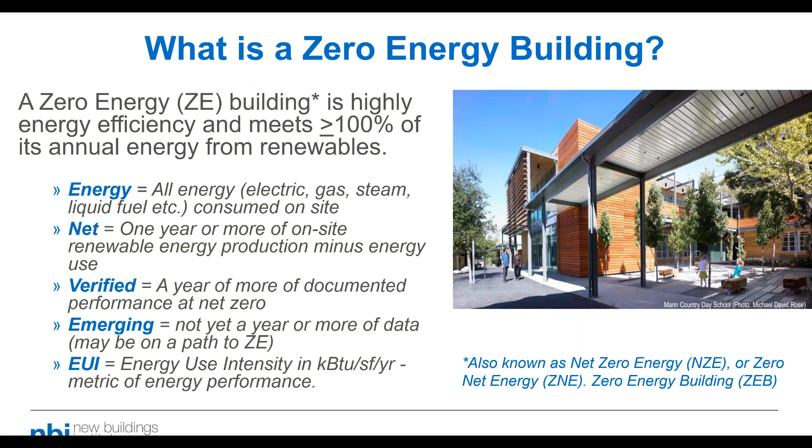And let's get into the fun, interesting parts of naming names. What's really fantastic about NBI's work and our story collecting about what's going on in net zero buildings, zero net energy buildings, is that we name names. No other database is as large as NBI's that collects the exact building, the characteristics in terms of square footage, the owner information, and then the data regarding its energy use.

So then this can serve for you and others and policymakers as well to show where are the buildings, who's building them, what like buildings. If you're a design team member, you want to say, where can I find somebody who's done a retail building? You can find it in this list that I'm going to share the big picture results from.

The first part that comes to mind when we talk about what's going on with zero net energy buildings, we talk about looking at the trends over time. So on the left part of the screen, you see the time since NBI has been collecting this data. We began in 2012 with our first study, and I could name about 60 buildings. And today we have actually 500 or more. We have 482 documented in the report you can get online, and you can see that 67 of those are verified and 415 of those are emerging.

But in the graph on the right, you see it by completion year, a little different than when we found them to put them on our list, which is the graph on the left. You see the trends of when buildings were being built, and you see a very steep curve in the last 5 years of attention to zero net energy and the growth in zero energy buildings in terms of completion.

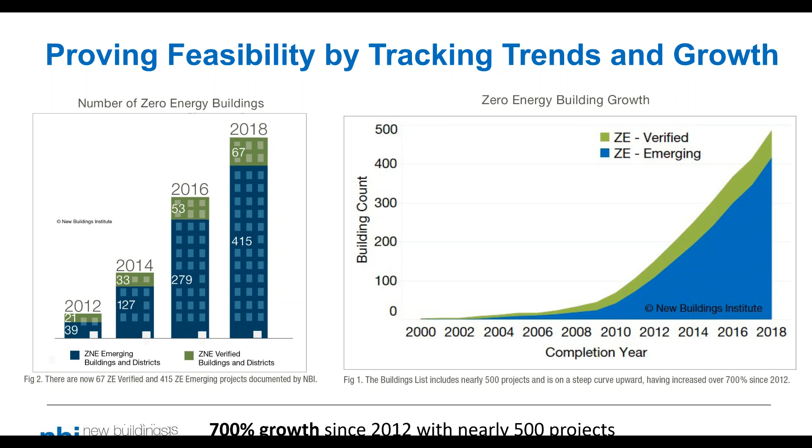Then another trend that also parallels more market trends is that on the left, the older buildings, the buildings that have been around 10 years or so, where we've gotten verified data, were mostly public buildings and mostly smaller size buildings of 25,000 square feet and less. Now we have a large percent, 40% of all of our buildings and 88% of the total square feet, over here on the right-hand side of the graph in buildings that are 50,000 square feet or larger. So that shows a trend that's picking up more market-sized buildings.

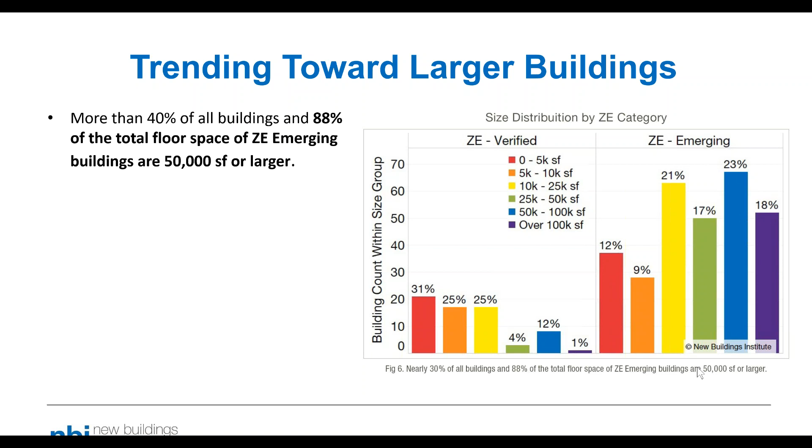And we're also having a fantastic trend with many of you on the phone being practitioners that are moving these buildings forward, designing them, advocating for them with your clients. And we have 70 mechanical firms on the list and 101 architect firms. So growing the tribe of buildings and practitioners that design those buildings is an important part of changing the market.

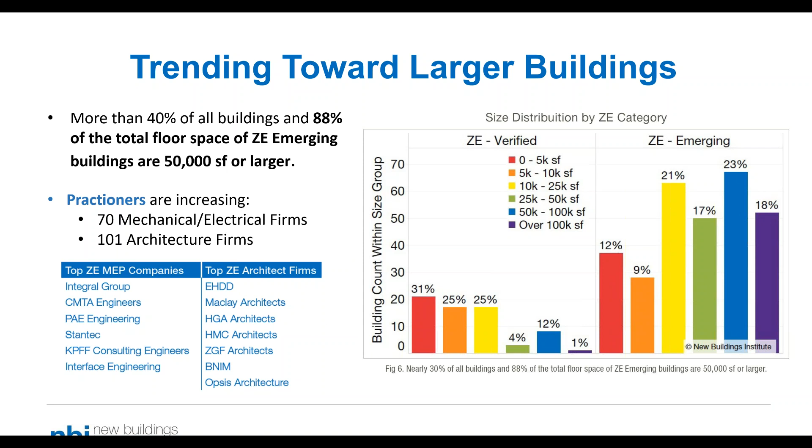Now about building types. As I said, it used to be primarily public buildings, and you saw some trends towards larger buildings, but schools is still the #1 building type. And my colleague here, Reilly Loveland, who's going to speak at the end of today, she's been diving deep into the schools marketplace. So while schools represent 37% of our zero energy buildings, and you can see the breakdown below where K through 12 schools are 50% of those, we're having great growth in diversity of building type, with a

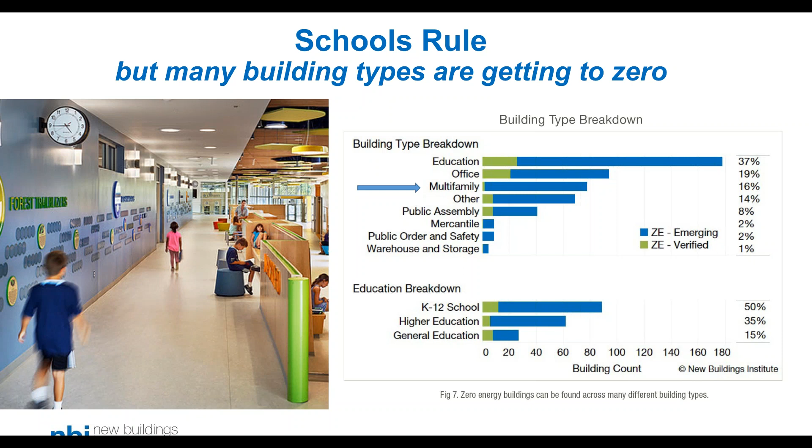high increase in multifamily, commercial type if there's 4 or more stories connected in multifamily. It becomes part of the commercial sector. And I'm showing just the top types of buildings, but we have over 15 building types that have reached zero energy performance or are emerging. And as I said, with the larger buildings coming in, we're seeing more private sector growth.

And this is one of my favorite stories about ZE and one of the most compelling, I think, market transformational statements. Although zero energy buildings are still a tiny part of the market and we've got to make it transcendent to be across the entire marketplace, the fact that we have over here in this left section, 26% of the 500 buildings are for-profit private, and this 46% here are all private sector. That's a fairly flipped image from 10 or 15 years ago, where the early emerging buildings were universities and nonprofits.

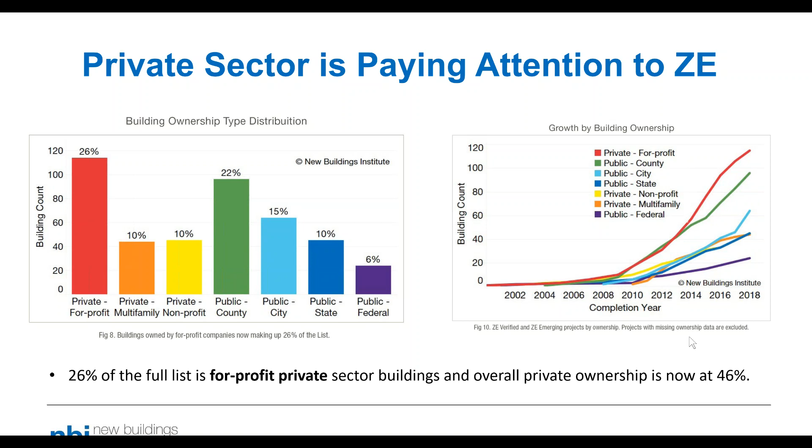And on the right, you see also this steeper curve in the red. That's for-profit buildings starting to take the lead in terms of new buildings that are getting started. So I love that the private sector is paying attention, and we're going to continue to try and get that attention and advance those buildings.

So what about performance? How low can we go? In zero energy, the lowest number wins, because you want to get your energy use down low so that you can then replace that amount of annual energy use with your renewables on site. So zero energy verified buildings have a median EUI, as I mentioned earlier, energy use intensity in kBTUs per square foot, of just 18. And compared to the average office in America, that is quite a reduction, about 60% less energy here.

And often people say, well, those are a lot of older buildings in that data set. But if you look at one of the most advanced codes in the country, Title 24 in California, it's still 46, almost half the energy use of a brand new best code building. So when we say that codes are advancing and there's not much margin left, these owners, these designers, these buildings are demonstrating the margin still exists at almost 50% savings potential over code.

And the same is true for emerging. Emerging are, some are measured performance and some are design targets, but they are also targeting and resulting in energy use in the gray band that is 50 to 70% less than standard practice.

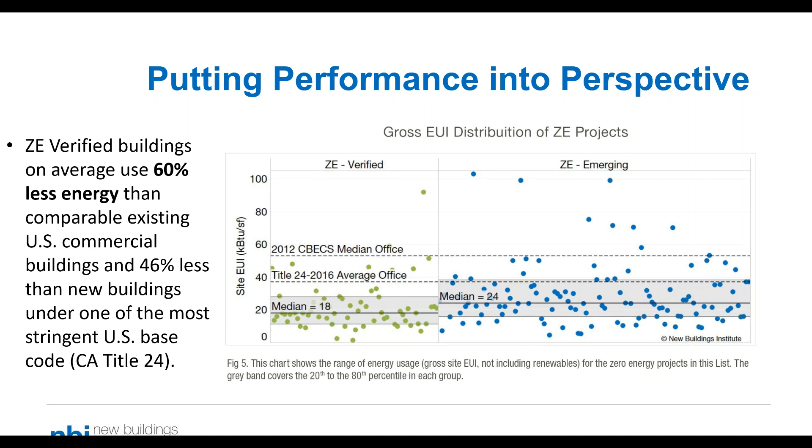So in the closing of this section, I want to mention a couple new collaborations NBI has, especially regarding collecting data and registering projects as zero energy. We're partnering with the International Living Future Institute, and we're going to have a collaborative certification program and a joint portal here on the left. We'll be bringing that out into the market in a few months, later this spring, we hope.

And on the right side of your screen, we're talking to RESNET, and we've formed a collaboration to work with the Residential Energy Services Network. They've done over 2 million homes in terms of a HERS rated system for energy efficiency. And we're going to work with them to move that into the database for zero energy documentation of the residential sector as well.

So your role in getting to zero is to both improve your skills, your knowledge by attending things like this, but also we have a new resource hub, and you can see on the left a whole lot of things that are there available to you. You definitely should be on the action bulletin. It comes out quarterly, tells you everything that's going on in this field that we can gather and put into a short bulletin for your attention.

A number of case studies, a number of resources, and still, when you're looking at data like this, if you know of a building that's even in the planning stage, in the design stage, under construction that might not be on our list, please register it. Share your story and get your building on there.

We'll be having our every other year Getting to Zero National Forum in April in Pittsburgh, and would love you to join us. Fantastic dynamic event, very design team focused, have the energy managers from efficiency programs, government policies, probably the most diverse range of attendees, and really focused in on moving buildings to zero and beyond buildings at the community level, at the policy level, beyond the building into the grid aspects. There's tracks on a lot of different topics you can find on the website.

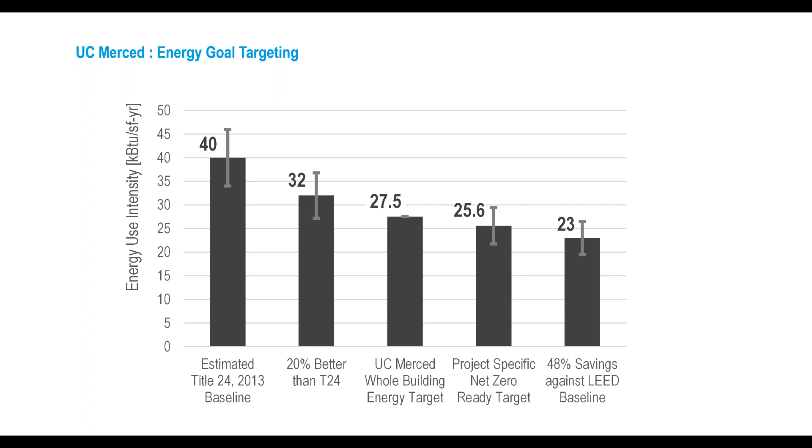So to get the energy use down, the first thing we did was focus on the envelope of the building, and thinking about the kind of heat you've got in this climate. And what you're looking at here is what our daylight modeling and simulation team did: they looked at annual radiation on the 2 worst facades of the building, the south on the right and the west on the left. This building sits on a block in Merced where essentially it takes up the entire block. So we didn't have a whole lot of options in terms of the shape of the building. So we have this big, long, south facade, big west facade. And so go to the next slide.

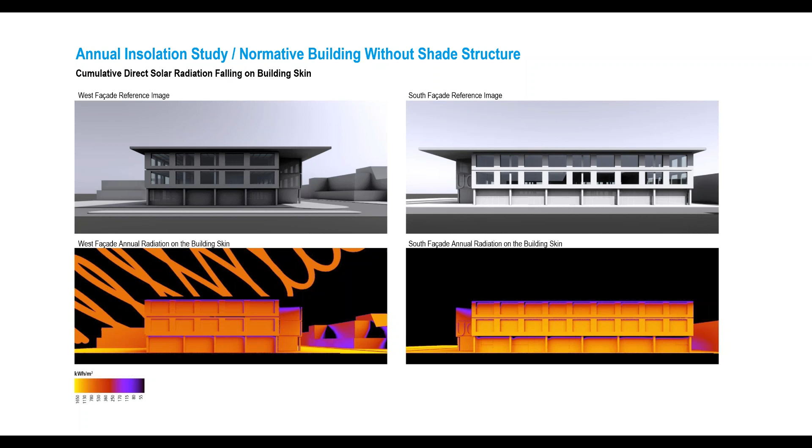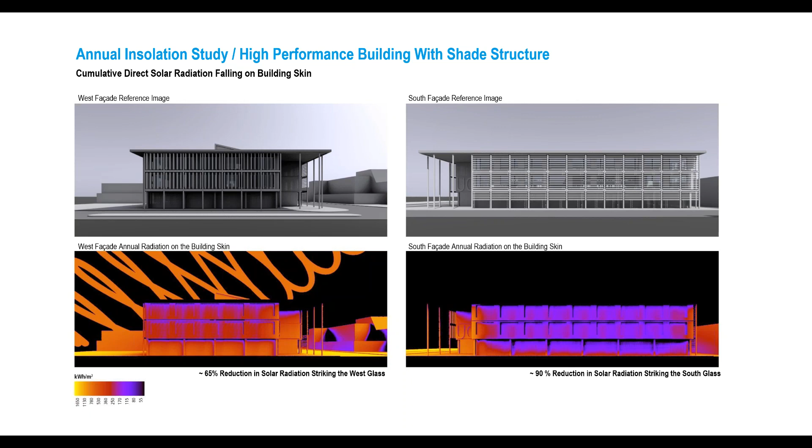And one of our strategies was to use an external shading structure to control the sun on those facades and reduce our cooling loads for the project, and in turn reduce energy use associated with cooling for the project. And so this kind of a shading device on the west and south sides did a great job of reducing that annual solar radiation on the skin of the building. But this project was a firm fixed price project that had a budget that we had to meet. And so these kind of shading structures can be expensive. Go to the next slide. And I'll explain how we paid for those structures in a moment.

The second thing we did with the skin of the building, with the envelope of the building, is we put a clerestory on the roof. You can see this is a big clean roof set up for PV. There's no mechanical equipment up there. All mechanical equipment is in the building or adjacent to the building on grade. So we got a nice clean roof for PV, so we can maximize the PV use.

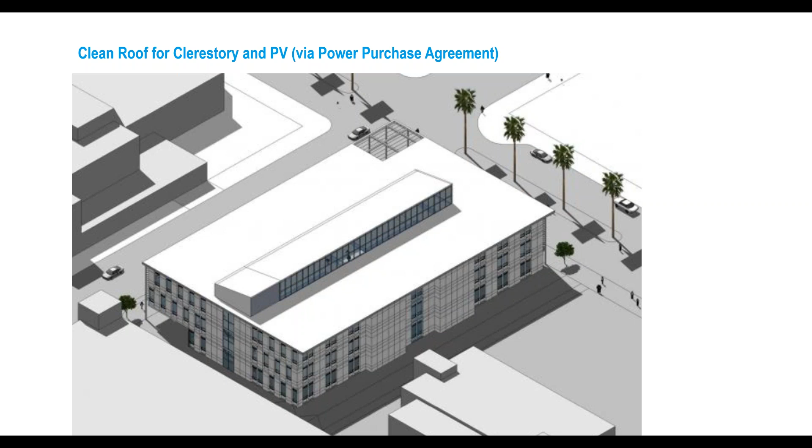And then we popped a clerestory up in there to bring light down into the building, into the center of the building, so that we could have the lights off, obviously, in the building as much as possible to save energy, and also to just enhance the quality of the environment in the building by bringing more controlled daylight into the building. Go to the next slide.

This was another daylighting analysis that will show you the difference between what it's like for a building without the shade structure and no light well in the center. And you can see how kind of bright it is out by the glass and dark it is in the middle. Go to the next slide.

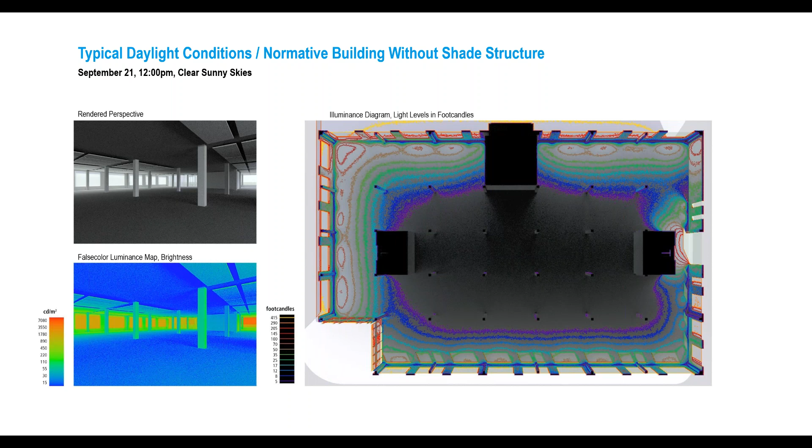Keep your eye up to the upper left here, and you'll see the difference in the quality of the environment when you can bring that controlled light in, and controlling the light on the facade. So this is sort of neutralizing the solar heat gain at the facade, but especially on the south side, that shading device actually bounces soft light into the space, bringing it in from the middle of the building, and able to turn the lights off many more hours of the year. And you have a better quality space as well. So go to the next slide.

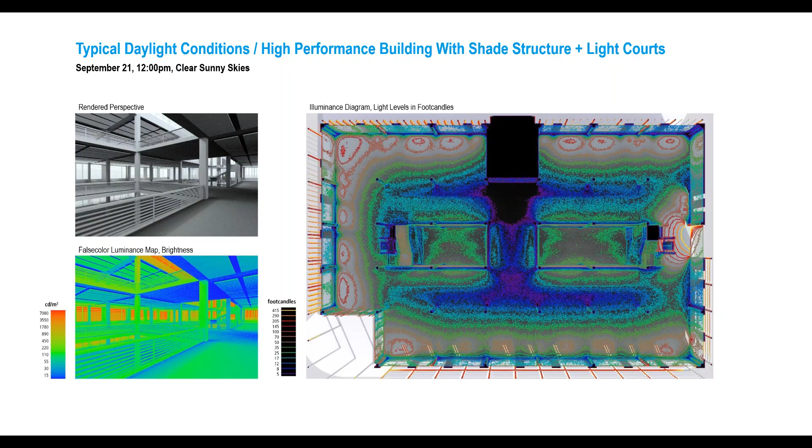Now let's talk about the energy and the dollars and cents of this. So we hit our target. We looked at a conventional HVAC system, which you can see as the second from the left graph, which was our baseline to compare against. It wasn't meeting the 27.5 target that we had to hit. Even with the shading device, we couldn't hit that target. Same with a fan coil system.

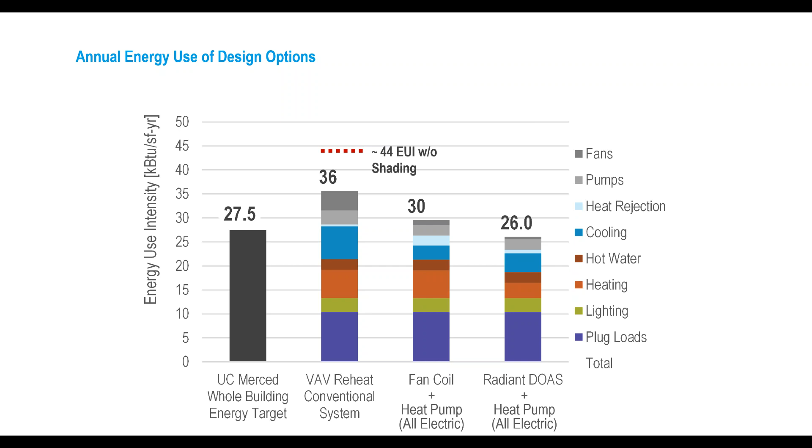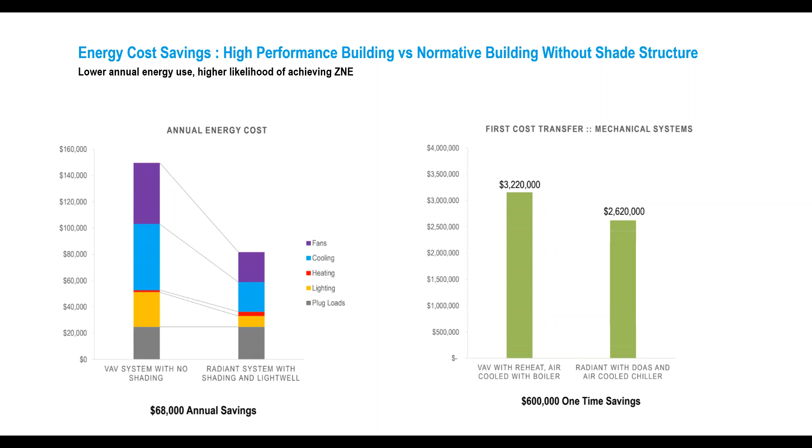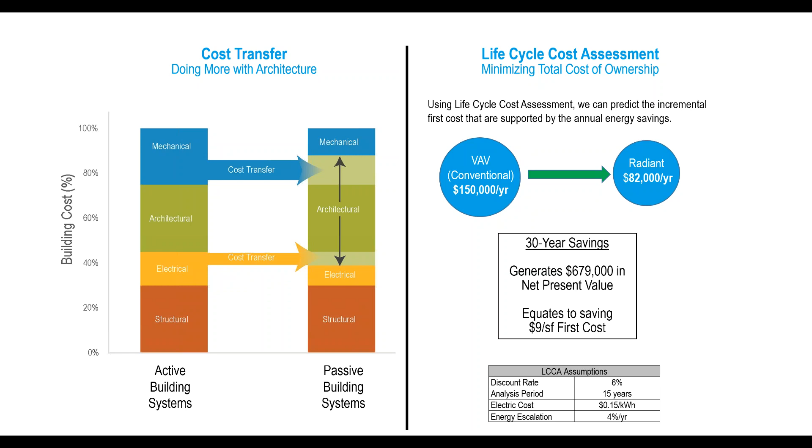The project just opened, and we're going to start to measure that building and hopefully hit our net zero target. The PV for that building is a zero first cost, provided with a power purchase agreement, a third party that comes in, puts the PV on the roof at zero first cost. So that's how we got to zero energy at zero cost. The next example I call go zero energy and save $1 million.

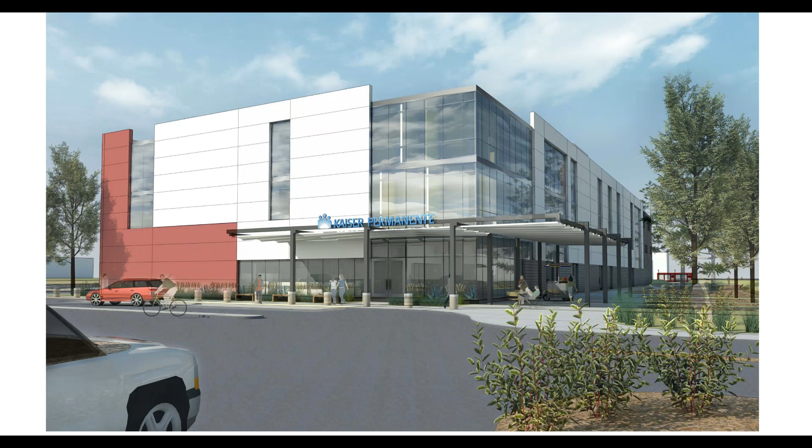Go to the next slide. A little better than zero cost, we're going to save $1 million. This is an 87,000 square foot medical office building, 3 stories, in Santa Rosa, California. Go to the next slide. Another image of the backside, so you can get a sense of what this building is like. This is a medical building with doctor's offices, exam rooms and a pharmacy, a straight up medical office building for Kaiser Permanente. Go to the next slide.

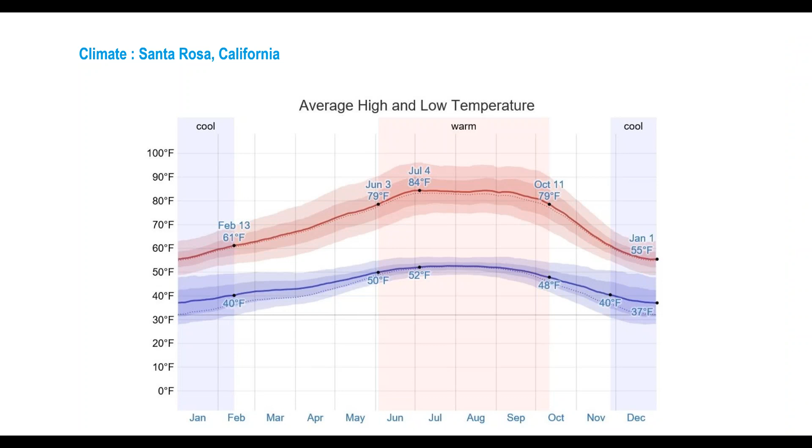Santa Rosa is a little milder than the other project site. Still, it's in California. It's a dry climate, warm summers, so this is a cooling dominant climate, but pretty similar in the winters. You're getting into the 30s and 40s, not quite as hot in the summer, but definitely cooling dominated. Next slide.

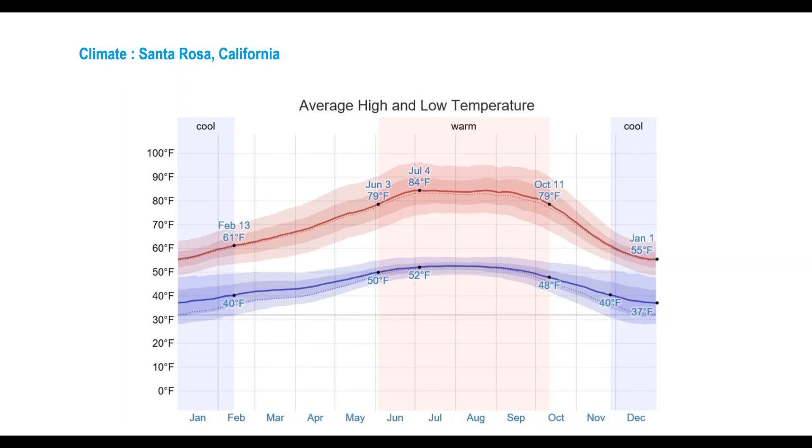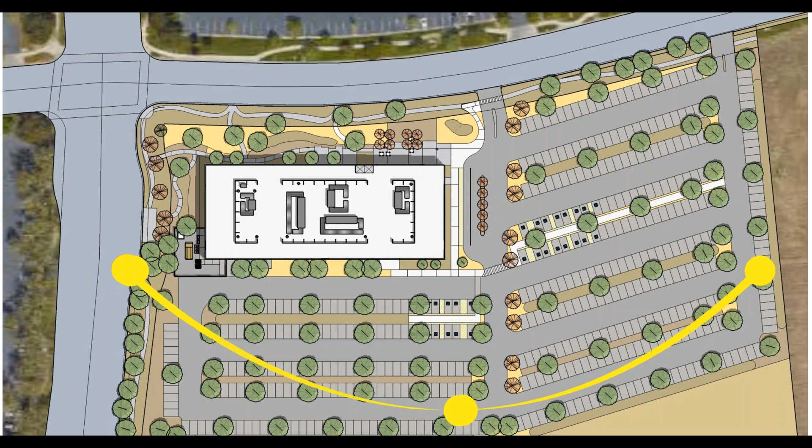The first thing we did was, we had a significantly sized site here to put the building in, so we oriented the building on an east-west axis because we had a choice, and made it as long and narrow as made sense for the program, because we know it's easier to control the sun if you have predominant north and south facing facades and smaller east and west facades. So that's the orientation of the building. Next slide.

And the first thing we did, similar to the previous project, was look at the envelope of the building and tune up the facade so it makes as much sense from a design perspective, an aesthetic perspective, an energy perspective. One of the important parts of this project is it was a really tight budget the owner was trying to hit, so every place we could find to save dollars in first cost, we took it. For example, on the south facade, very small window wall ratio.

That's because on the other side of those windows are just small 100 square foot doctor's offices. You don't need a lot of glazing to daylight a doctor's office or give them a view to the exterior. So the facade is tuned for the program behind it. On the north side, we've got stairwells where you see lots of glass. Those stairwells are not even conditioned spaces, and some conference rooms have a little more glazing on the north side, where we don't have the issue of solar heat gain. So we could have a little more glazing there, and it made sense from a first cost perspective and an energy perspective. So go to the next slide.

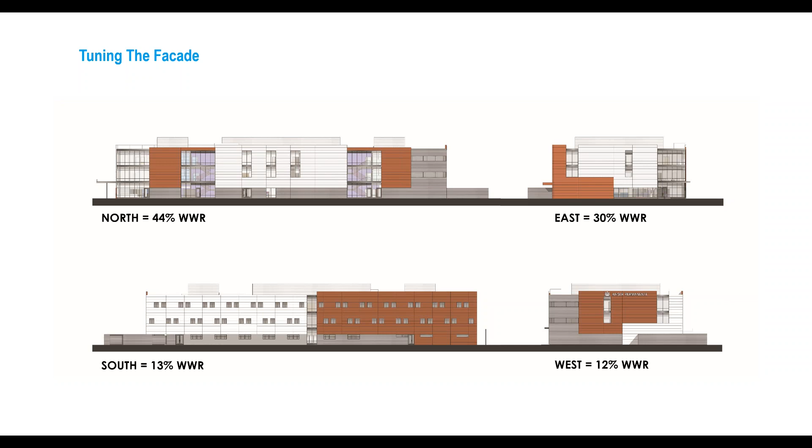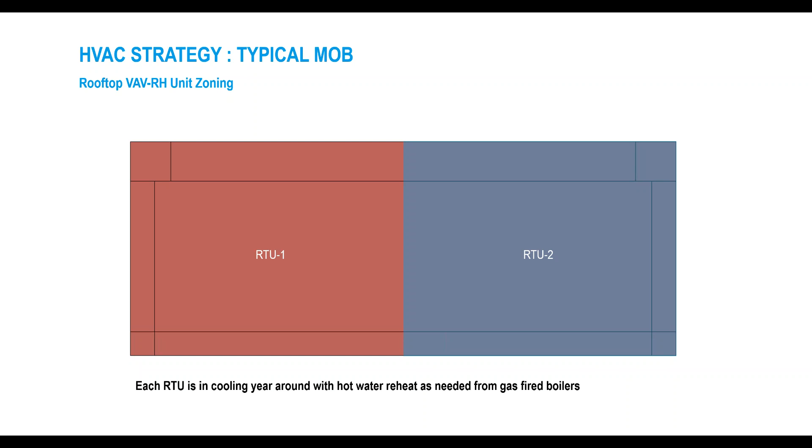The next thing we did was focus on the HVAC systems. What they typically do with these medical office buildings, in such a simple building, you would typically see 2 rooftop cooling units and boilers, and those units are in cooling mode all year, and then we're just reheating that air at VAV boxes around the building to do both heating and reheating if required in those spaces. So pretty inefficient. You're heating and cooling at the same time. Not a great way to hit a net zero target. Go to the next slide.

Instead, we did something that we call thermodynamic zoning. One of the ways that we think about zero energy projects, like the previous project, is how do we make them all electric? So we're not burning any fossil fuel in the building. Then when the PV is offsetting the energy use of the building, it's actually offsetting all of that electricity, and could turn into a zero annual energy cost at some point, because you're offsetting all that energy. You don't have an additional gas bill.

So the client had never done an all-electric building before, but we proposed this and said, look, we can put heat pumps up on the roof. Instead of 2, we could put 5 smaller ones, because we reduced all this glazing on the facade and reduced the cooling loads significantly. We'll put 5 units up there, and each one provides either heating or cooling.

So we're not cooling and then reheating that air. We're not simultaneously heating and cooling. We're either doing cooling or we're doing heating based on the orientation of the space. So we put these heat pumps in the north, east, south, west, and in the interior of the building. And so this is the strategy to get to an all-electric building and simplify the building significantly and reduce energy.

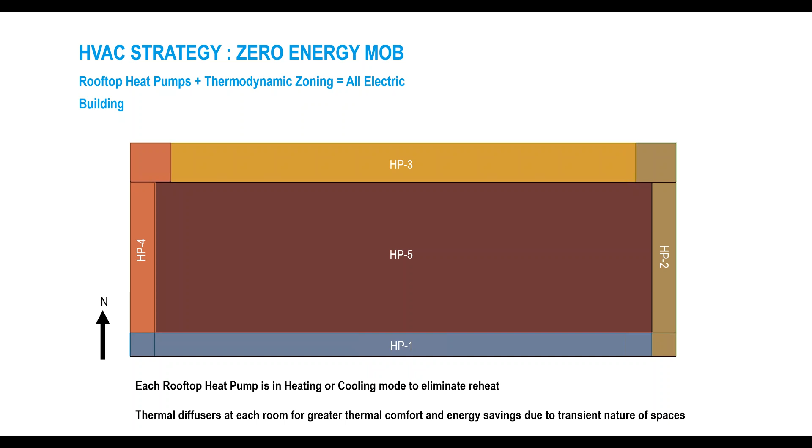So go to the next slide, and we'll see how this applies to the actual floor plate of a building like this. So this is your typical medical office building on the south side, as I mentioned before. Very tiny doctor's offices, don't need a lot of glazing, and you've got a bunch of exam rooms on the interior of the space. So we just set it up so that, because the orientation of the building was simple on an east-west axis, we could simply put 5 units in here and serve each of these facades.

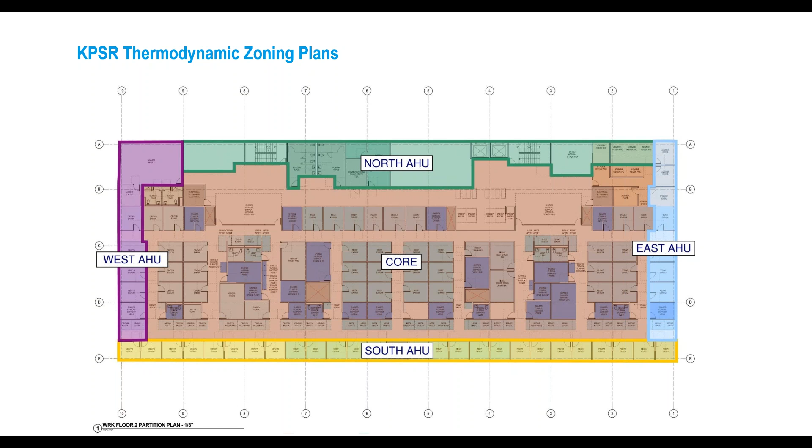Then, say on a cold day, you might be in cooling on the east side of the building in the morning because you are getting some sun on that facade, and the west side might be in heating because it's a cold morning, it's not getting any sun. Fine, we're not doing simultaneous cooling and heating. We're heating and cooling where we need to, and only where we need to. So go to the next slide.

The other thing we did that complements this idea of the thermodynamic zones is we did what we call thermal diffusers, or Therma-Fuser is a manufacturer of these devices, and each air diffuser in each space is its own variable air volume device. Instead of having VAV boxes scattered around the building, we have just these diffusers in each space that actually control the amount of air based on the temperature in each space.

And this works great for a medical office building because it's such a transient building. The doctors are in their offices for a little while, then they go off to an exam room, then they're back in their offices, and the exam rooms are occupied for a little while, then they're empty, and then the next patient comes in. So this kind of system can react very quickly to the transient nature of a building like this with all these little individual offices. Saves energy and is more comfortable for the occupants, and kind of simplifies the whole building HVAC design. Go to the next slide.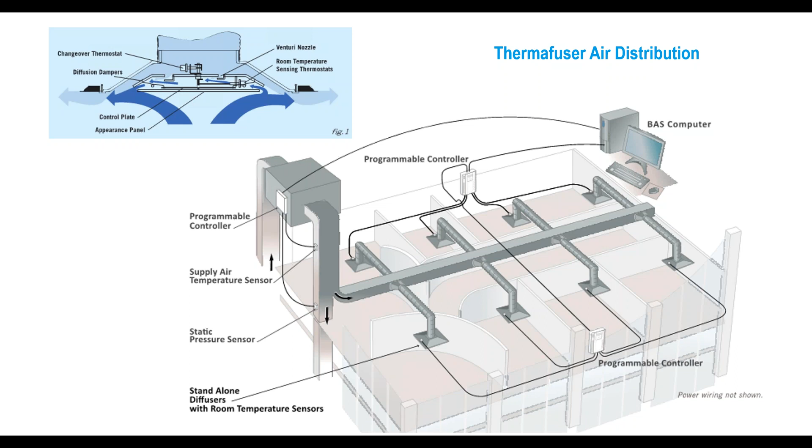So in our perspective, this was a design assist project. We had a contractor on board early, and we're trying to build a very cost-effective building. The contractor thought the first method I explained, VAV reheat with boilers and a bunch of piping all around to do this reheating all over the building, is the lowest cost way to design these buildings. Most mechanical subcontractors would say that is the cheapest way to build a building. But what we realized was that it's actually a complex way to heat and cool a building.

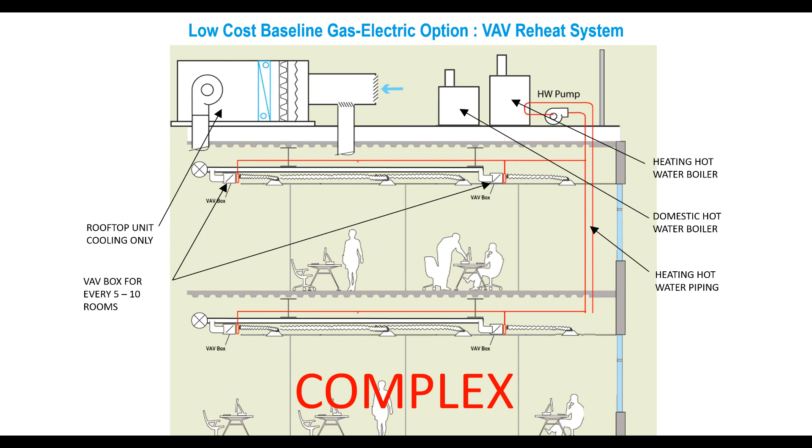And when we saw their cost estimate for this, and we proposed the heat pump strategy, go to the next slide, we realized that it was really a lot simpler. There's a lot less stuff in the building. There's a lot less of everything, especially that piping all around the building, which is very expensive. Pipe fitters are some of the highest paid workers on site. And so we eliminated all the piping on the project, all of the natural gas to the building we eliminated completely, and we used heat pumps for everything.

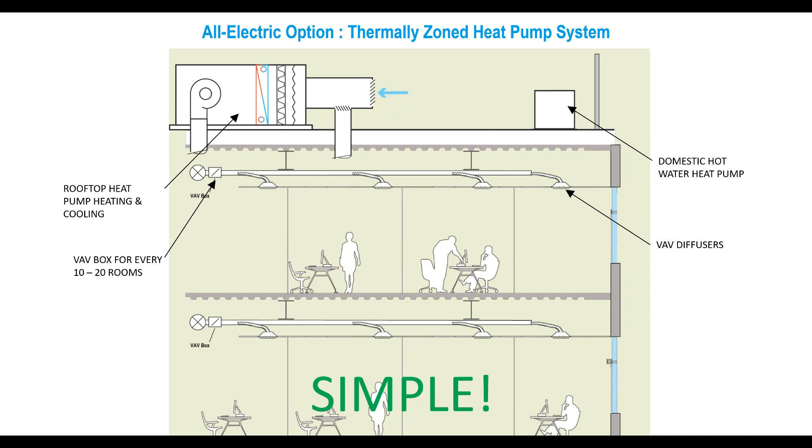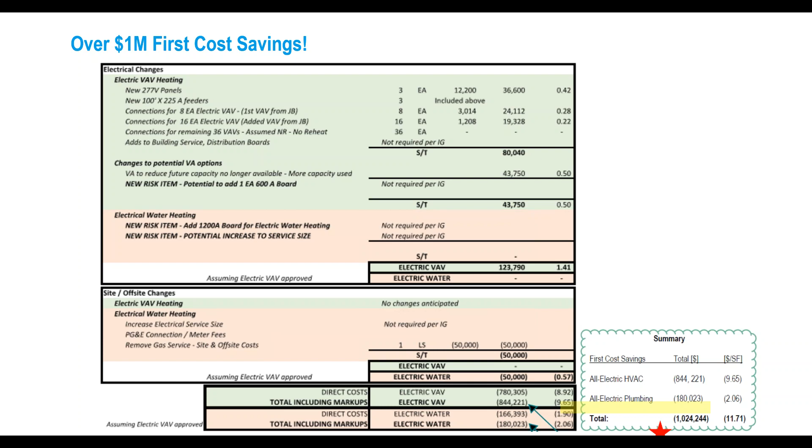And this dramatically simplified the building and reduced the first cost, go to the next slide, by over $1 million. This is a spreadsheet from Turner Construction, the construction company that we were working with on this project. And so down in the corner there, you see the $1,024,000, that's the actual savings to go from the original, what was considered the lowest first cost HVAC system, to the heat pump, thermally zoned, all-electric system that we were proposing, with a $1 million savings in first cost on the project. Go to the next slide.

And significant savings in energy and energy use to get us to our net zero EUI target. In this case, we just wanted it to be as low as possible to hit the net zero, because the PV was going out into the parking lot. We weren't constrained by the roof of the building. The PV was going in the parking lot. So there was some flexibility on where this EUI could be, but from where we were at the basic baseline code building, we save roughly 50% energy use in our modeling of the all-electric heat pump version of the building that was also saving $1 million first cost.

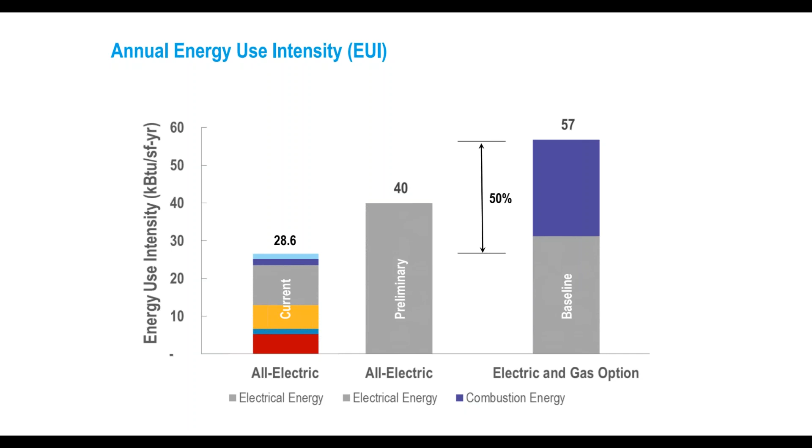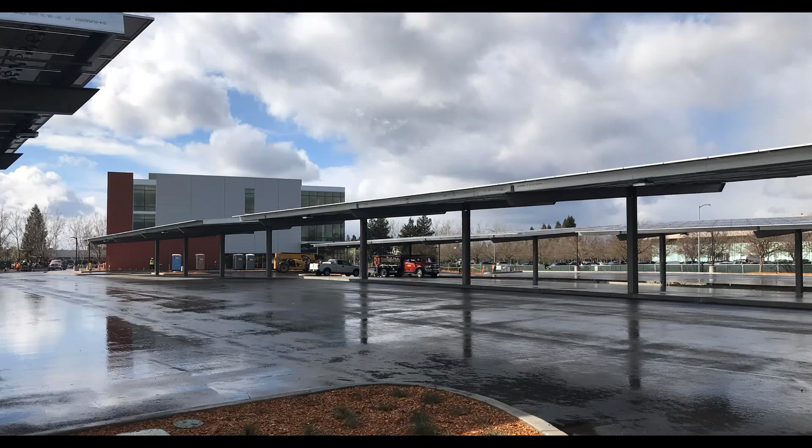And so this is the image. This building is about to open for business. This was taken just a couple of weeks ago on the site. You can see the PV and the building in the background. Again, no professional photographs yet, but a building that's just about ready to open its doors so we can start measuring for zero energy performance.

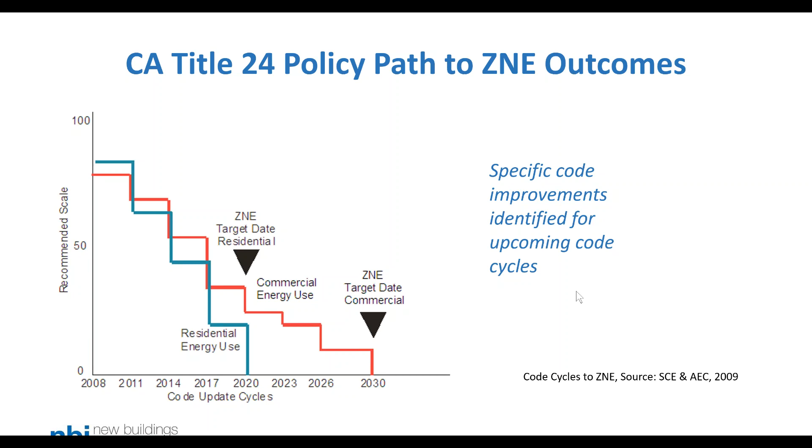It's very interactive now. And in terms of policy, one of the leading states in the country and one of the leading entities in the world in terms of putting in place date certains for change in energy use is California. And you can see how they've got set goals for 2020 for residential here and 2030 for commercial new construction. So this is a policy driver, and even though it may be in California, it's become a model many other entities are using for how to advance their codes and policies.

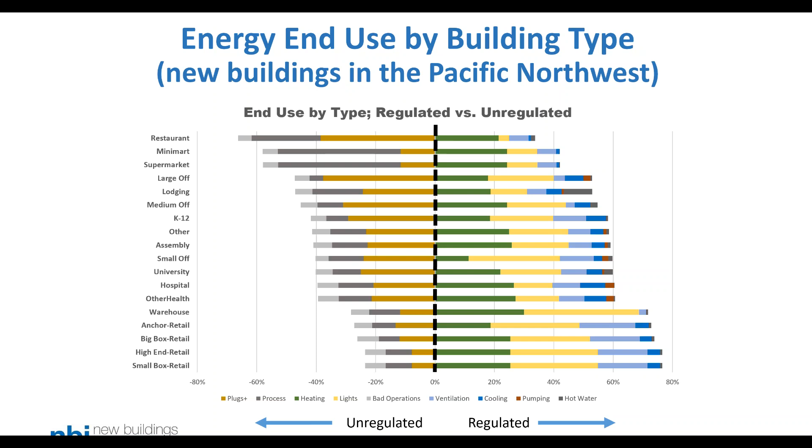We've got to get a handle on ways to post-occupancy continue to have both systems, operational practices, and occupant engagement that will reduce that down to get the actual performance to meet the design intent. And then the PV in the yellow can take it down to zero or better than zero.

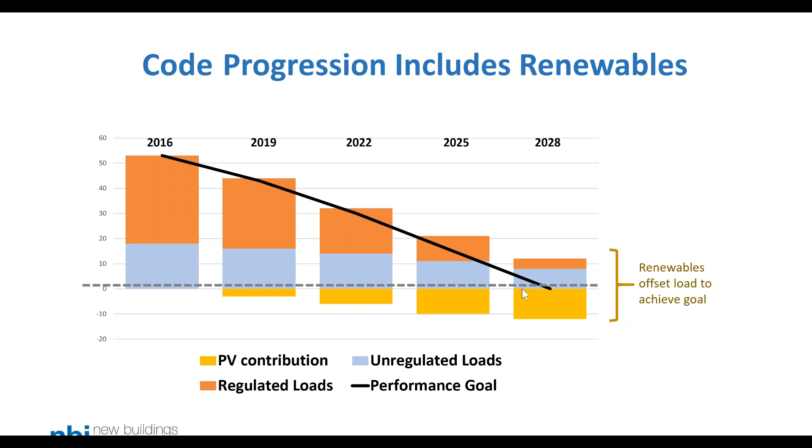You may have heard about the duck curve. We've got to be cognizant of the fact that to generate a ton of renewables in the middle of the day only helps the middle of the day. In the absence of storage, that good load that's coming from solar renewables for the most part feeds into the building and usually can exceed a building load in a place like Merced or Santa Rosa, any warm climate with sufficient PVs. It's going to be feeding back into the grid.

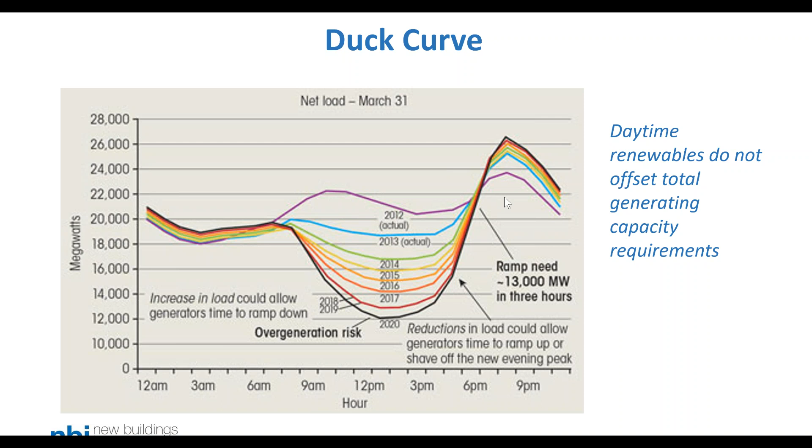The grid's going to be challenged to distribute that excess energy at a time when other people are generating renewables and nobody's giving back into the grid up here in the shoulder time of day, in the early evening and evening time. So a lot going on in this area of time of use and shifting both price signals and technology mechanisms to flatten out the belly of the duck.

So the key policies, if you're going to work in that area, and many of you on the phone do, that can support moving zero energy buildings forward are listed on the left. Again, we have a policy tracker here. Riley's going to speak next on a couple states and city efforts, and she tracks these policies as best we can keep track of a very increasing dynamic of advancements towards zero energy.

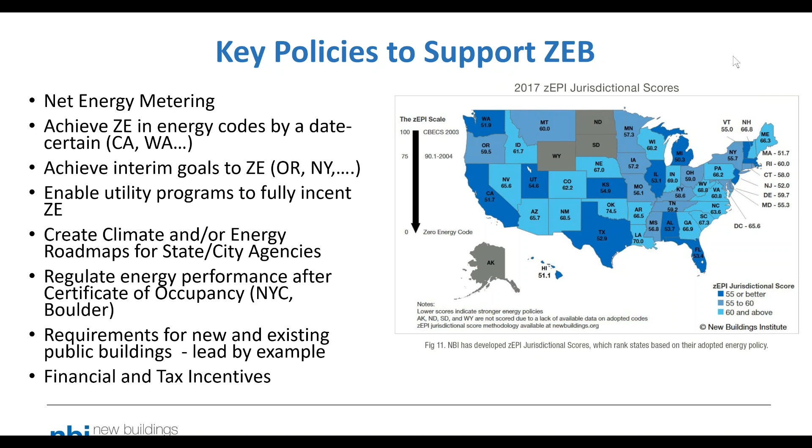And the map on the right is a brand new metric that NBI introduced based on something Charles Eley developed years ago called the Zero Energy Performance Index. And we've just begun the rating of state policies. And ACEEE, who rates energy efficiency programs and gives states ratings of how they're doing in their energy efficiency, is now going to adopt this as a comparison metric of how a state is doing towards zero energy policies. So Riley's going to speak a couple slides, then we'll go to questions.

Great, thank you, Kathy. So as Kathy mentioned, I maintain this database or tracker to track the top programs, policies, codes, and other programs that cities, counties, and states are using to get to zero. On this first slide, you'll see these top states that have implemented some of these policies and codes that are driving the market transformation. Many of these have done things like passed executive orders or have adopted codes or stretch codes to drive energy savings in buildings. And you'll see in the bottom here that this map is on that Getting to Zero resource hub that Kathy mentioned earlier, and it shows the advanced policies that we have tracked.

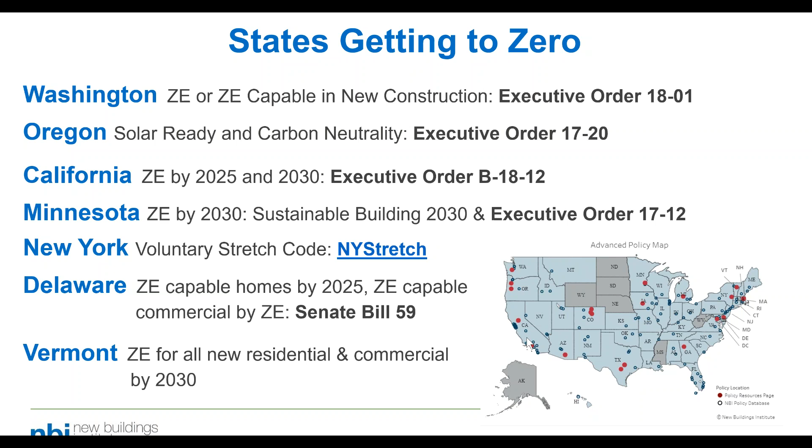So although many states are driving the zero energy movement, the local level is really where all of the action is. So there are many different avenues that are being taken by these localities to get to zero energy, and they generally fit into 3 buckets. So the first one here is carbon neutral policies, where 37 cities are targeting carbon neutral. The second is zero energy buildings, and 11 cities have zero energy ordinances or policies, and even more have a stated goal of getting to zero energy. You can see them listed here.

And the last one is 100% renewables. So 4 cities currently have goals for energy to be supplied by 100% renewable energy by a certain target date. So this avenue is gaining a lot of traction, and more jurisdictions are looking into this kind of clean energy future. And the important thing to note here is that these 3 buckets are distinct, but that many cities have policies that overlap 1, 2, or 3 of these buckets to employ this well-rounded zero energy or zero carbon program. And this table on the right here is an example of the ZEPI score that Kathy just explained a little bit ago.

And one thing to note is that we are constantly updating this database or tracker and are always looking for more information about states and cities that are getting to zero, counties included.

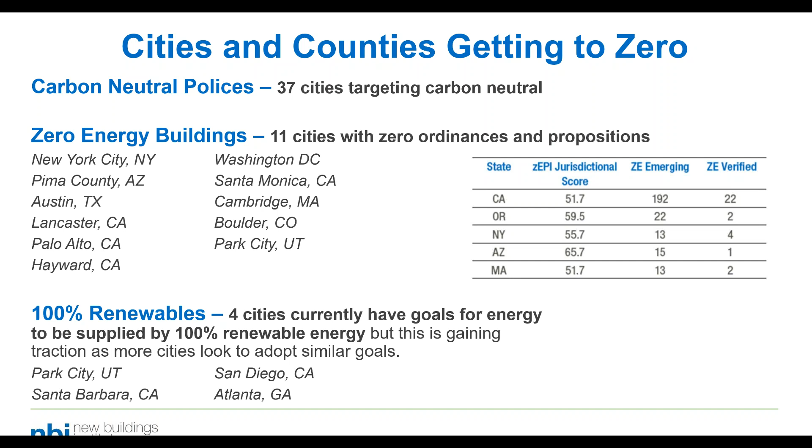Okay, we had a question that directly relates to what Riley was just speaking to. Are the executive orders only for state-owned buildings? You know, it depends on the state. Some states have it for state-owned buildings, then some start with state-owned buildings and then go statewide or move through different building types. So it kind of depends on the specific one. And if you want more specifics, feel free to email me.

Okay, and this is probably for all 3 of you. Have you seen a change in willingness of building owners to embrace newer technologies, for example, all electric, or other low EUI design engineering practices? And what does it take to overcome that reluctance and risk aversion? Is price sufficient? Go ahead, John.

You know, that last example I gave you, the all electric design, it was new to that client, but if anybody here from the Southeast is on the phone, I used to practice in Florida. We used to do this all the time. It's not new to anybody there. It just happens to be new to this client. And sometimes, when I'm in the room with a client the first time, neither of those projects, the client said, hey, this has to be a zero energy building. It was our